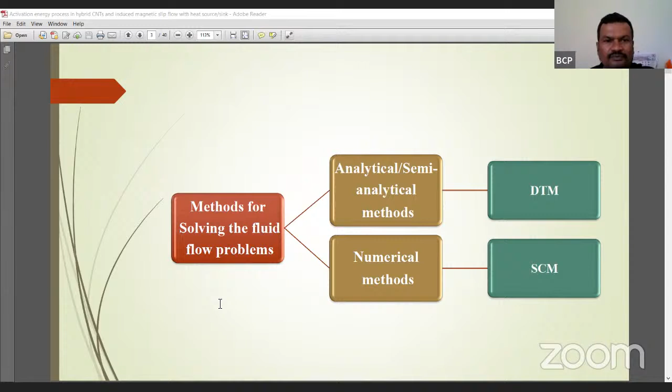Before starting the actual topic, the differential transformation method, let me explain the difficulties in solving problems arising in fluid flows. As we know, there is no closed form exact solution for the Navier-Stokes equations, which govern flow problems, and it is a millennium problem also. But because of approximations, particularly boundary layer approximations, they can be reduced to an easier form.

Some parameters we have deleted, and now we can obtain closed form solutions for a few cases. But still, since most of the problems are nonlinear and coupled, it is not easy to obtain a solution. But many semi-analytical methods are available, like differential transformation method, optimal homotopy method, homotopy analysis, homotopy perturbation. Like that, series solution methods are also available.

But nowadays, because of advancements in computers, in particular the usage of applied software like MATLAB, Mathematica, and Maple, we are very much convenient, and we have an advantage of solving these nonlinear problems with inbuilt functions. I should say they are ready-made programs like boundary value problem solvers. But it is not easy to get an accurate solution from those, and also validation is not so easy.

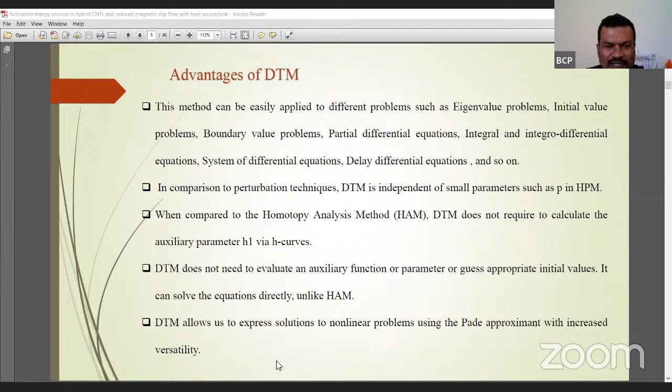Now, types of DTM. Here I discuss one-dimensional DTM, which is applicable particularly for solid mechanics problems, and two-dimensional DTM and its application. And very importantly, the very recently introduced alpha-parameterized DTM and its applications; you can find some two or three papers on it.

And even you can apply 3-dimensional DTM, n-dimensional DTM, but it is a little lengthy, and of course computation is a little difficult, but I am sure with the help of computer programming it is not much difficult. But much work has not been reported on alpha parameterized DTM, so a lot of opportunities are there for the researchers to use this method effectively in one-dimensional problems.

I'm sorry, this alpha parameterized DTM cannot be applied for higher dimensional problems. So it is an improved version of one-dimensional DTM. So where there is one-dimensional water pollution, solute transport problems, or even atmospheric modeling which involves one dimension, and solid mechanics problems, effectively we can apply alpha parameterized DTM, which is very effective compared to one-dimensional DTM. As I already mentioned, it is an improved version, an advanced version of one-dimensional DTM.

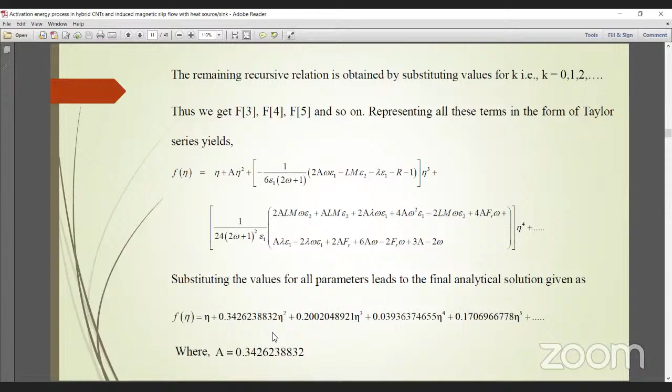So, getting this f of eta depends on how many terms you are getting. Here I have considered only 4 terms. That is sufficient for me. And the accuracy of this analytical solution depends on the effective programming with Padé approximant. And we got this, and this is the solution.

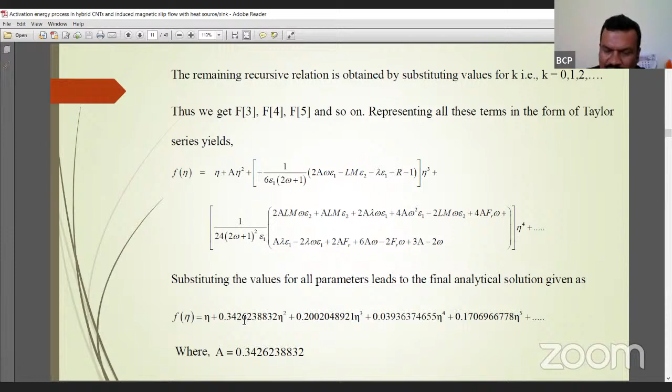See, comparison of one-dimensional DTM with other numerical methods. I have compared: solid line is DTM and RKF dotted lines. RKF method is the Runge-Kutta-Fehlberg fourth-fifth order method. It is a very well-known method and very effective, and particularly for solving nonlinear problems it gives an effective solution. See, this matches exactly. And later, I will compare it with exact solution also. As I already pointed out, for very few cases we have an exact solution.

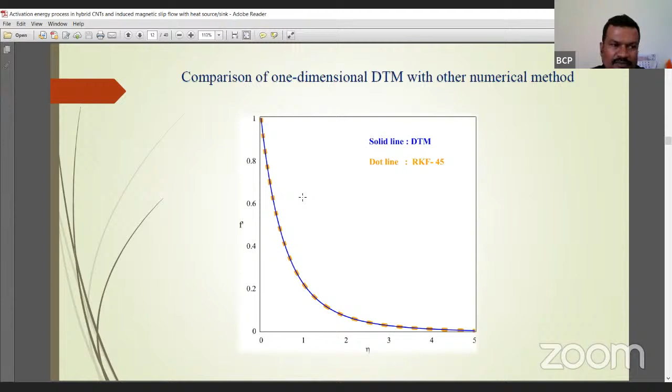This is a velocity. I have found out a velocity. Okay. Now I will go for the two-dimensional DTM. So two-dimensional DTM, here it involves two variables. Then of course, ordinary differentiation is not possible. I have to consider partial derivatives.

So you see, capital Y of K and H. There I have considered only one K, and here it is H. K factorial, H factorial. So partial derivatives I have considered at X and T. And here I am considering time dependent. One is X variable, another T variable, and at 0, 0. There it was just X is equal to 0.

Now differential inverse transformation. For this, if I take inverse, this is a summation, K from 0 to infinity, H from 0 to infinity, an infinite series I will get. And combining above two equations, we get Y of x, t is like this.

Properties of two-dimensional DTM. See, it looks little complicated, but no. Once you understood, definitely it is not a difficult one. Now you see original function and its transformation functions. I will take C1 capital H1, C2 H2. And all the properties are just similar to one-dimensional DTM, except where the product occurs.

So here also same. And for partial derivatives, this will be like this. And you see the same thing I applied for second variable. And here product of two functions H1, H2, and product of derivative of two functions, and so on. And you can observe that the summation exists, R from 0 to K and S from 0 to H.

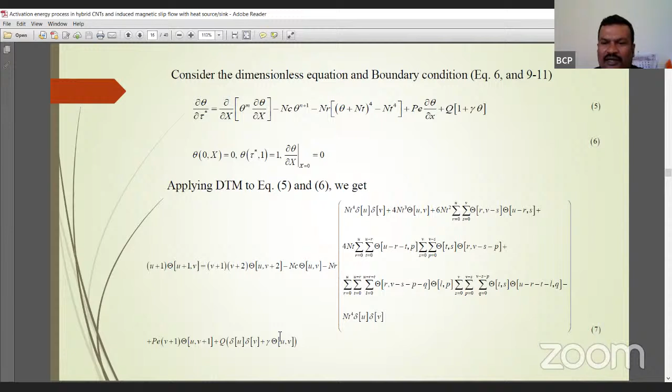And you can observe here, we can get this type of series solution for equation 5. And the boundary conditions, after transforming, will be like this. And solving above equation with the boundary condition, I will get theta 1,2, theta 1,3, theta 2,2, theta 2,3 like this. These are successive approximations.

And representing all these terms in the form of Taylor series. We know how to express a Taylor series. I have got this solution. In earlier one-dimensional DTM, I explained how to obtain the velocity. But here it is in temperature, theta of tau, x. See, I got this. Even the problem is simple, for this simple problem, I have got this much.

Okay, substituting the values for all the parameters leads to the final analytical solution. Again, by using Padé approximant, I got theta like this. Already I mentioned, without applying also you can obtain, but accuracy matters. I have compared 2D DTM-Padé with the finite difference method. Here also it gives almost exact. It almost matches with the finite difference method.

So now I come, this is what I want to explain. This is alpha parameterized DTM, a new method recently introduced, and very few research papers are available in alpha parameterized DTM. Alpha parameterized DTM, or alpha PDTM, is the new generalization of the well-known DTM for the approximate solution of boundary value problems.

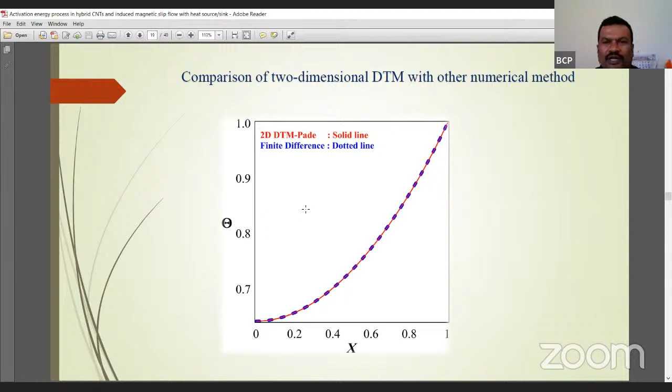Sorry, alpha DTM. So application of alpha parameterized DTM I'll explain. Now consider the following ODE. For a simple problem I'll explain: y double dash plus 3y dash is equal to 0.

As I have already mentioned, alpha parameterized DTM is the improved version of one-dimensional DTM. Presently we can apply it only for an ordinary differential equation. It is one-dimensional. So with boundary conditions, I consider simple examples for the purpose of explaining. Here x belongs to -1, 0.

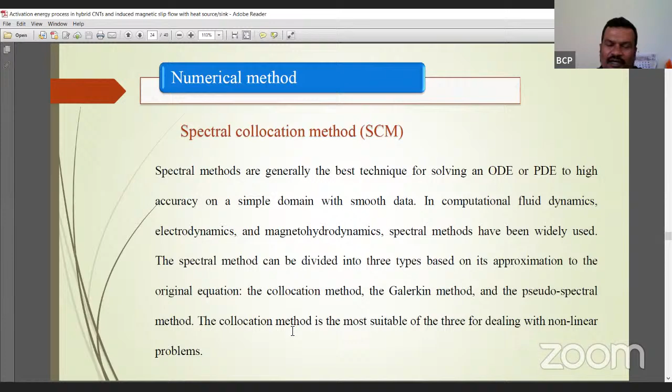Next one is spectral. This is one analytical method I have explained. Now I'll go for the numerical methods. So spectral collocation method. Many of you already have good knowledge about the Galerkin method and pseudo spectral method. These are spectral methods, and I am using the collocation method. We have solved a few research problems with the spectral collocation method. Those who have good computer programming skills will definitely have a good advantage with this.

Advantages of spectral collocation method. In the field of numerical simulation, spectral methods have been shown to have a very fast rate of convergence. That's why the spectral method is very famous: very large converging speed when compared to most commonly used numerical methods. FEM, finite element method, and finite volume methods provide linear convergence, whereas spectral methods provide exponential convergence. It is faster than these two.

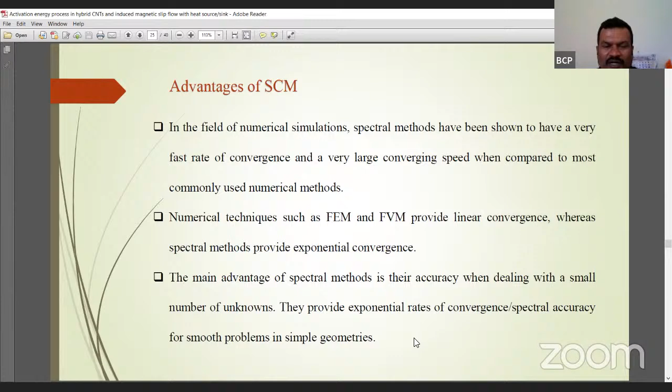The main advantage of the spectral method is accuracy when dealing with a small number of unknowns. It may not be so effective when we are considering coupled equations, but when there are very few variables, a very small number of unknowns, then definitely this method is more advantageous. We applied this spectral Chebyshev collocation method, and it's quite simple. Programming is also quite simple.

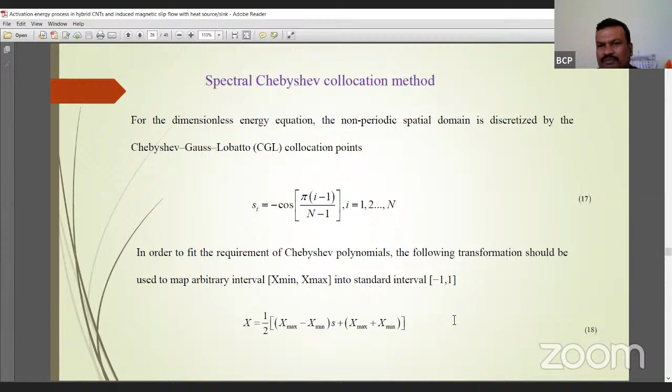This is a non-periodic spatial domain. And application of the spectral collocation method: consider this problem. This is again a fin problem with boundary conditions. So after applying this, the equation can be rearranged. I did the multiplication, and after this I am getting this equation. Now, according to spectral collocation theory, values on collocation points can be approximated by an interpolation polynomial, such as the Lagrange interpolation polynomial.

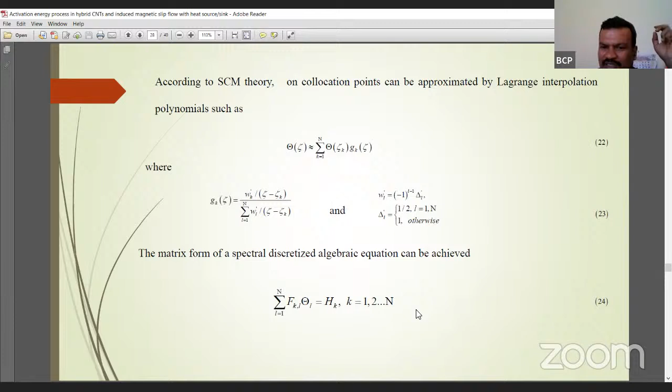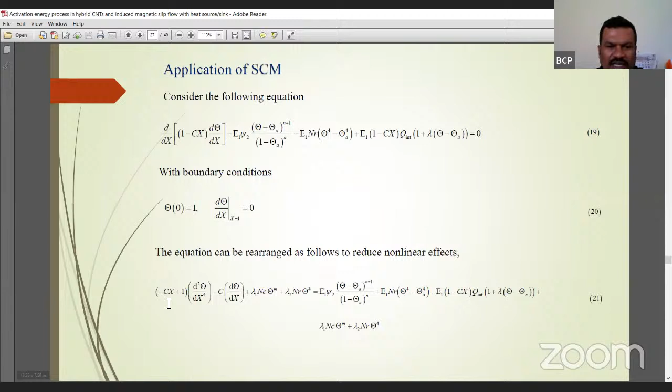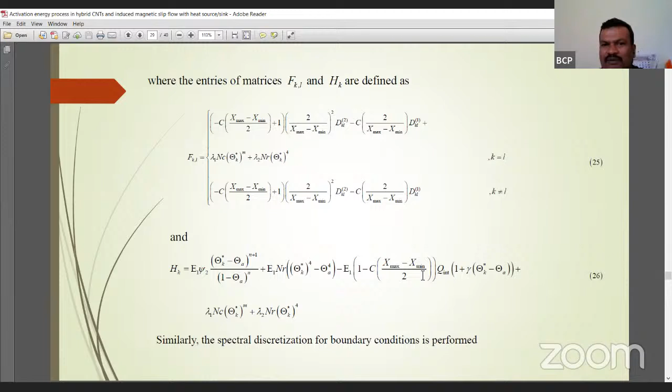The matrix form of the spectral discretized algebraic equation can be expressed like this, and FKL and HK are defined like this. These are all inbuilt functions; you can easily understand these things. The only point is the programming side, how to do effective programming. So this is the equation I'm going to apply the spectral collocation method to. You can observe here, after applying, n+1, x maximum, x minimum, it all comes from this FKL and HK. Okay.

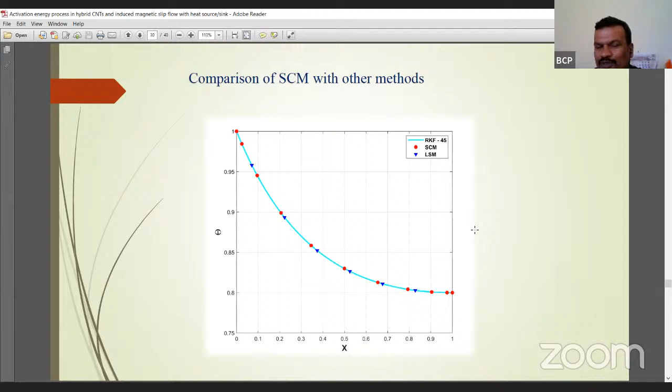Okay. So now, up to this method, we used software. I used inbuilt programming software like MATLAB and Maple. We are using Maple exclusively, and MATLAB programming also we are doing. Now, there is always a doubt which programming is better, and how to do programming. I will explain BVP4C, BVP5C, boundary value problem 4C, boundary value problem 5C. You must have heard this in MATLAB programming. And also boundary value problem NDSolve, DSolve, which we hear with respect to Mathematica and Maple. Those things I will explain, and I will compare which one is best.

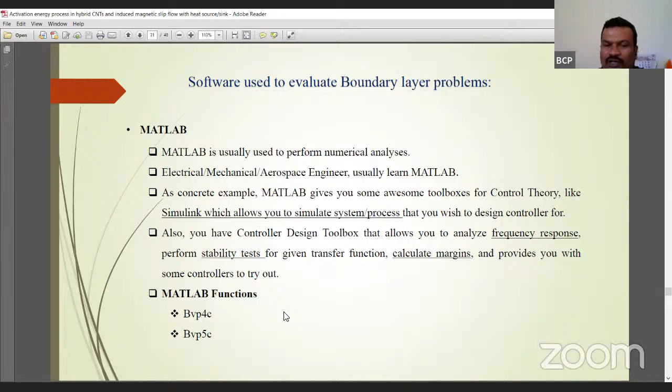Say MATLAB. So in MATLAB, we have two functions, BVP4C and BVP5C. Boundary value problem solver 5C, boundary value problem solver 4C. The program is a little different. Minimum changes are there, but there is quite a difference in these two. BVP5C always gives a better solution than BVP4C, but it has its own limitations. I'll explain it. In BVP4C, the maximum error is more compared to BVP5C. Calls to the ODE function are less.

In any of these methods, BVP4C and BVP5C, we have to convert PDE to ODE and solve. In BVP4C, calls to the ODE function are less. Calls to the ODE function are more in BVP5C. And calls to the boundary condition function are less in 4C, more in 5C. Calls means the number of requirements for the ODE as well as the boundary condition is more in 5C compared to 4C. In BVP4C, the solution is obtained with a smaller number of mesh points, and in BVP5C, we use more mesh points.

Mathematica. So, the term Mathematica means a set of instructions which helps us to solve a particular problem on the basis of mathematics and is used to perform complex queries. We are using Mathematica also. Mathematica is most known for its symbolic computing, although it is much more than symbolic computing.

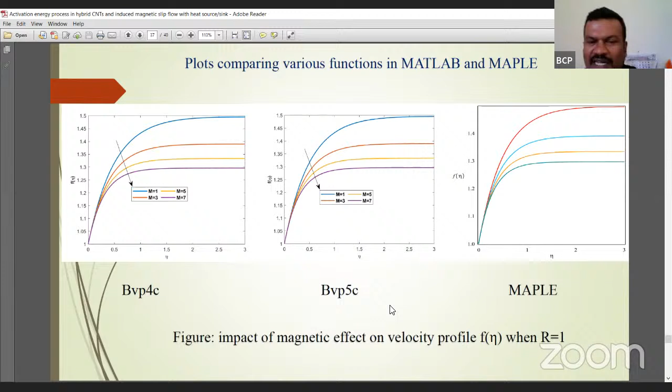And the same thing I applied to temperatures also. You see, here you can easily identify it. Of course, everywhere 1.5. As I have mentioned, there is no change in that. Behavior-wise, there is no change. And BVP4C and BVP5C, that matter I will explain next with numerical values. There you can see it very easily.

So here MATLAB and Maple programming I have explained. And here I plotted for both BVP5C and BVP4C. Very minute change, very minute change. Did you observe any change here? No, it's very minute. And you see the nature of the graphs, both are the same. The first graph I solved with MATLAB, the second with Maple. The first graph again I solved with BVP5C and 4C, and there is not much difference. But in both the softwares, BVP4C and 5C, there is a little change. In BVP5C, even though the program is a little lengthy, I suggest this program.